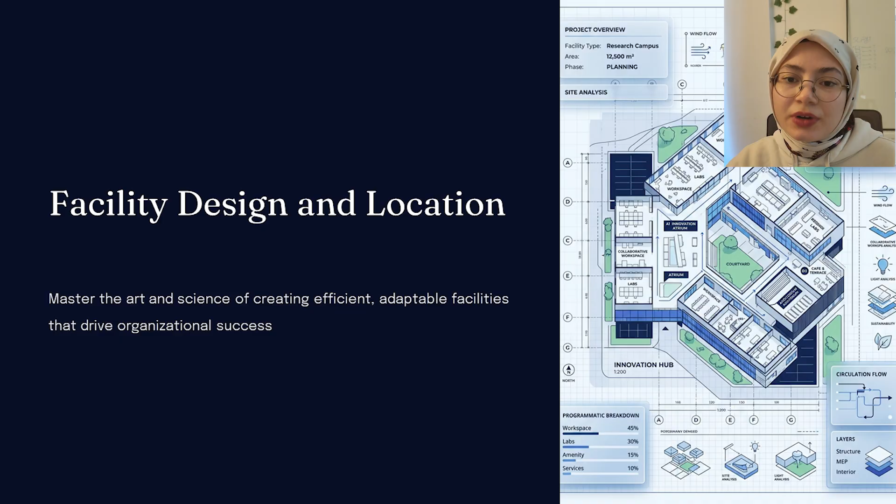Let's start the video. So, facility designing isn't just building walls, okay? It's about optimizing the circulation flow, ensuring sustainability, and balancing different programmatic zones like plants, labs, and collaborative workspaces. So what exactly are the facilities? They are more than just infrastructure. They are the converge points where people, materials, and machines interact with each other.

Whether we are looking at a plant floor or a high technology innovation lab, the objective is the same here: to minimize waste and maximize resource utilization, right? And effective facility management is the backbone of any operation. It ensures that every square meter contributes to the quality of the final output.

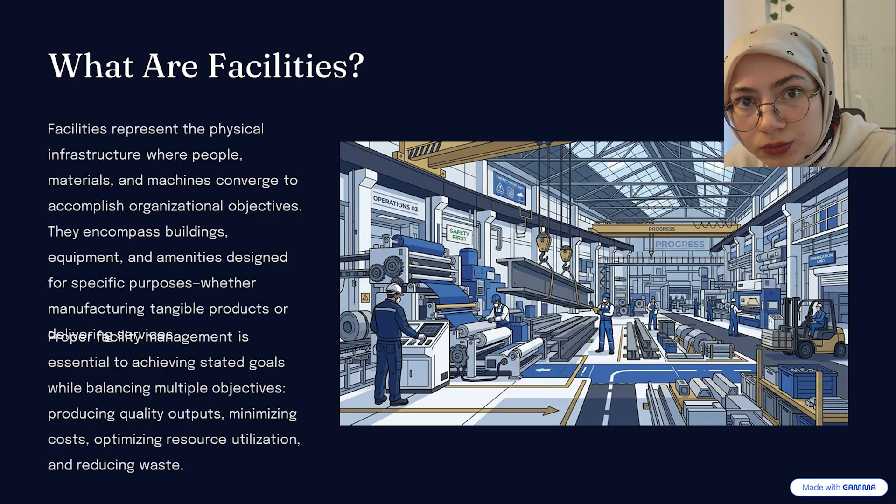So why does facility planning matter? It actually helps us to improve certain goals, like every plant needs to do. For example, quality impact. Poor facility design leads to defective products and customer dissatisfaction, which can cause bad reputation for us. And the other point is cost efficiency, of course. Inefficient layouts increase handling and maintenance expenses significantly.

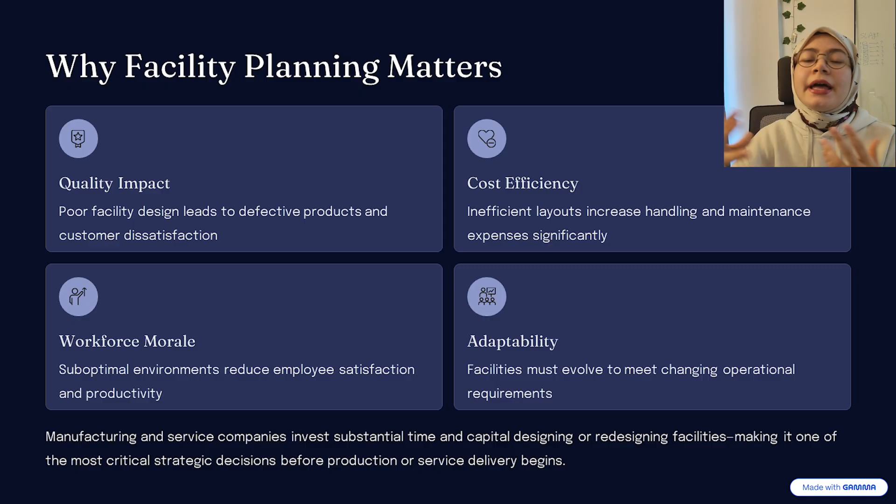And the other point is workforce morale. Suboptimal environments reduce employee satisfaction and productivity. If our employees are not happy with us, we can't do anything. We can't do the production, right? And adaptability, of course. Facilities must evolve to meet changing operational requirements. Manufacturing and service companies invest substantial time and capital designing or redesigning facilities, making it one of the most critical strategic decisions before production or service delivery begins.

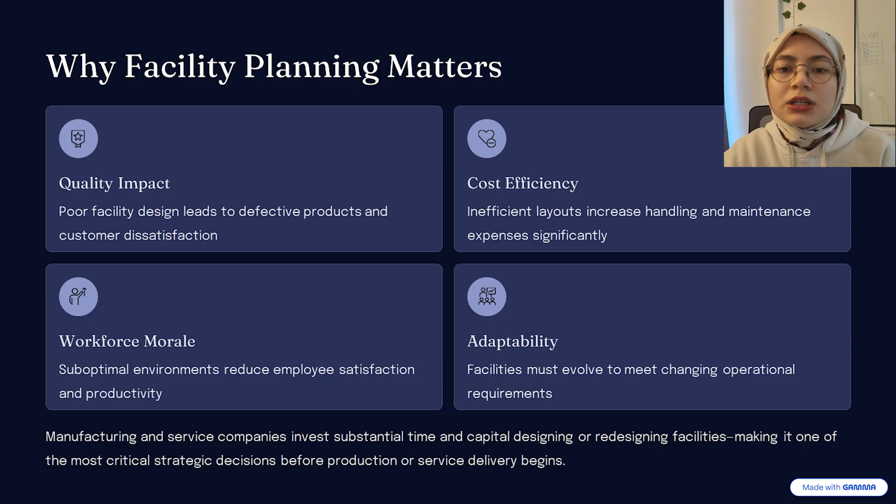And facility planning represents a multidisciplinary approach combining technical expertise with creative problem solving to create functional and efficient spaces. Like we have engineering disciplines, for example, civil, electrical, industrial, mechanical engineers. And on the other hand, for the design professionals, we have architects, consultants, urban planners, of course. As we get help from different disciplines, applications will be from different sectors. For example, manufacturing, healthcare, service industry, logistics.

In manufacturing, you have to plan the assembly lines, production facilities, and industrial plants. Healthcare, for example, hospitals, you need to plan every little step for human health, right? This is the most important thing for us. And service industry, we have hotels, restaurants, airports, etc. Facility planning illustrates how fixed assets support achieving organizational goals in an optimal way, which is what everyone wants to do.

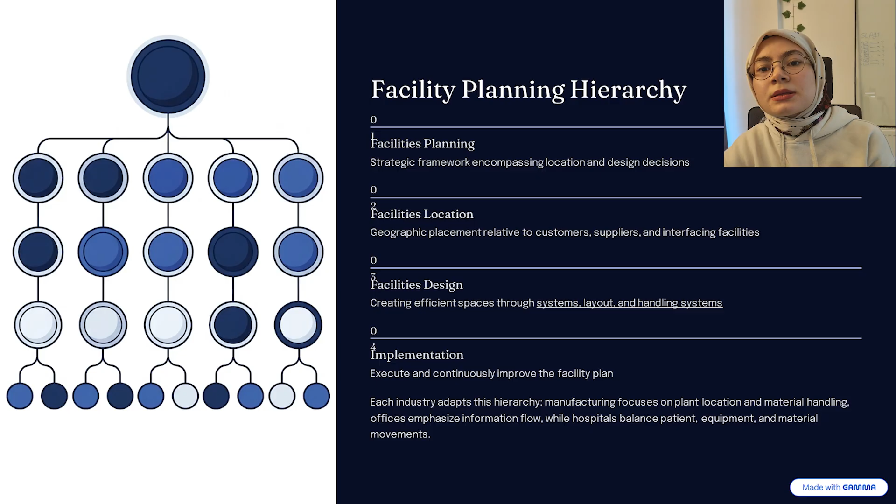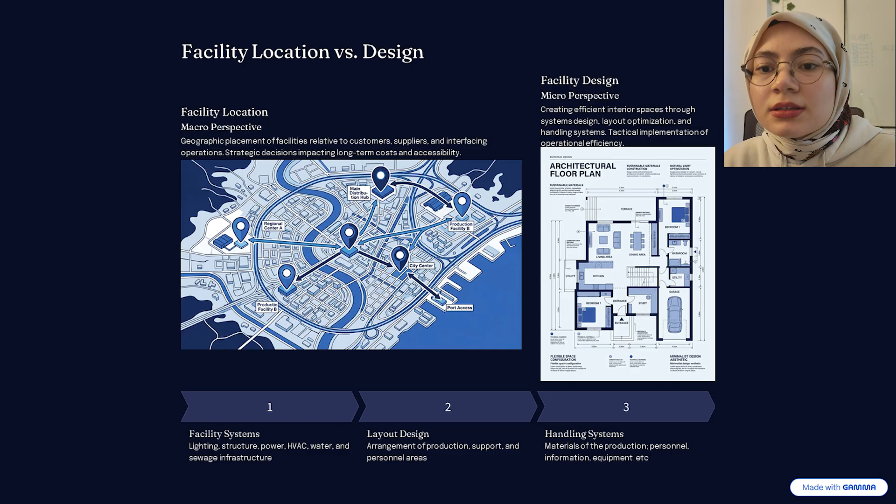Here, we have three main steps, which are facility systems, layout design, and handling systems. The handling system is what you need for production, okay? Materials of production, personnel, information, equipment, etc. And for the facility system, the system of production, like lighting, power, water, and sewage infrastructure, etc. And lastly, we have layout design, which is the facility design part, the arrangement of production, support, and personnel areas we have to design.